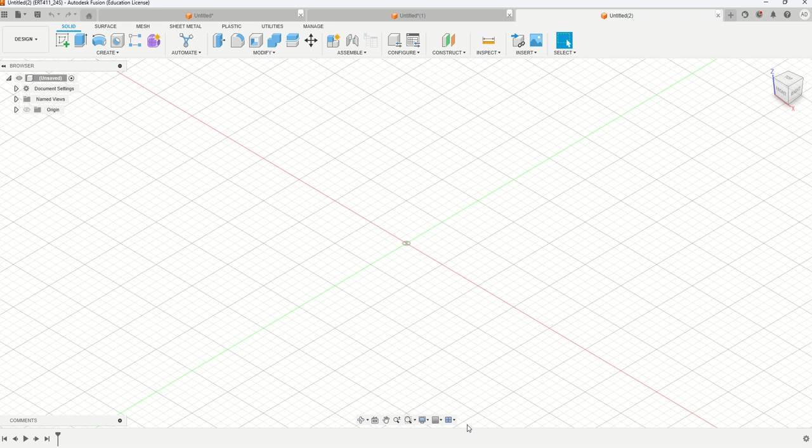Okay, here we go with our next drawing. This is going to be this one here, tutorial number 2. Draw a sketch of the model as shown in the figure by using the line tool. Alright, so this little horseshoe right here.

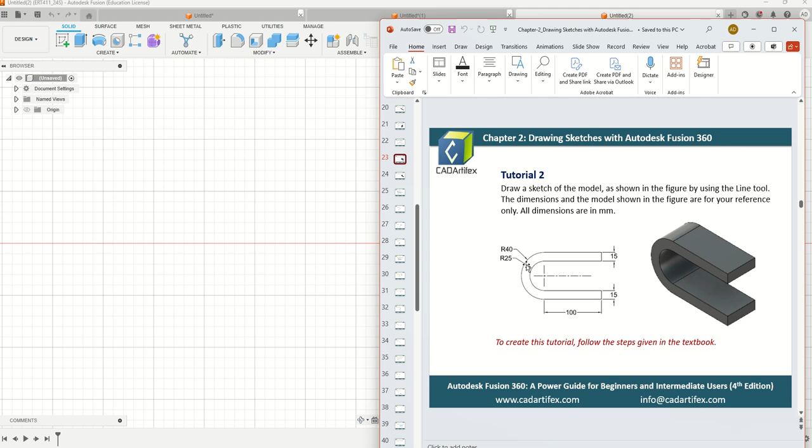So let's sketch this thing. Let's draw it again from the top. And it looks like we've got, this is 100 long by 15. And then we've got a radius of 25 and a radius of 40. So I'm going to guess that what it's trying to get us to do here,

we have 100, and then 15. Let's go up 15. And we'll come back this way 100. Now, let's draw some arcs here. I'm going to move this out.

So let's create an arc. How do I want to draw this? Let's draw a 3-point arc. So let's go from here. This is supposed to be 25. So we're going to come over 25 and up 25, which would be here.

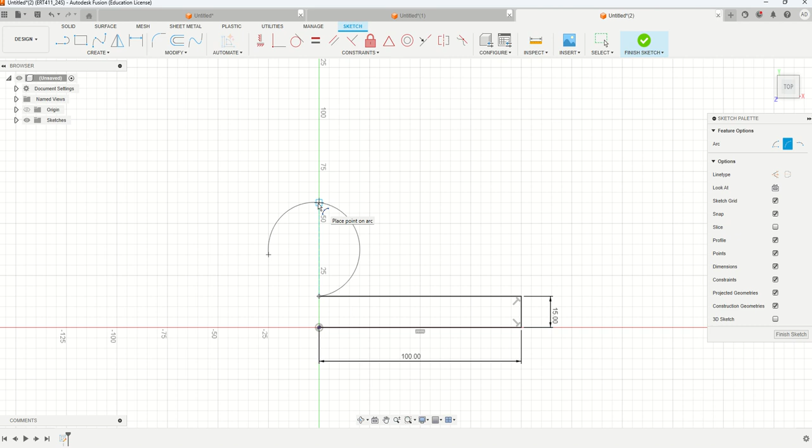I'm doing that wrong. Create an arc here and here. And place a point on the arc, which would be right here. Am I doing that correct?

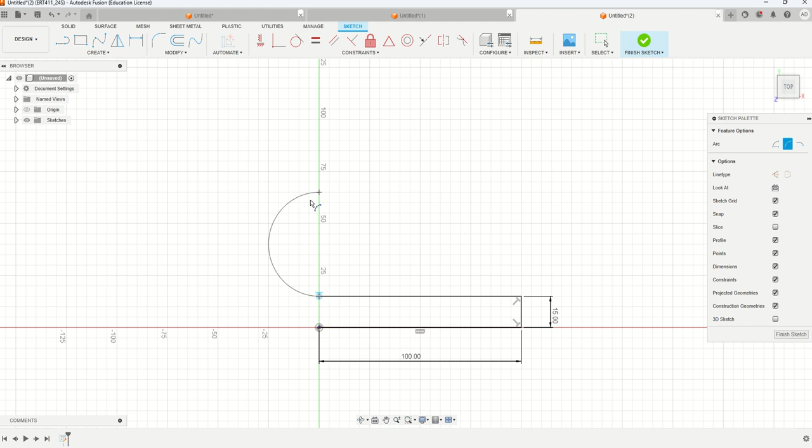No, I put that in the wrong spot. Let's go arc, 3-point arc, right here, right here. That's where I want to be. And then right there, that's the center point. So that's over 25, up 25. Right there. So that's my arc. And then if I was to dimension that, you can see that has a radius of 25.

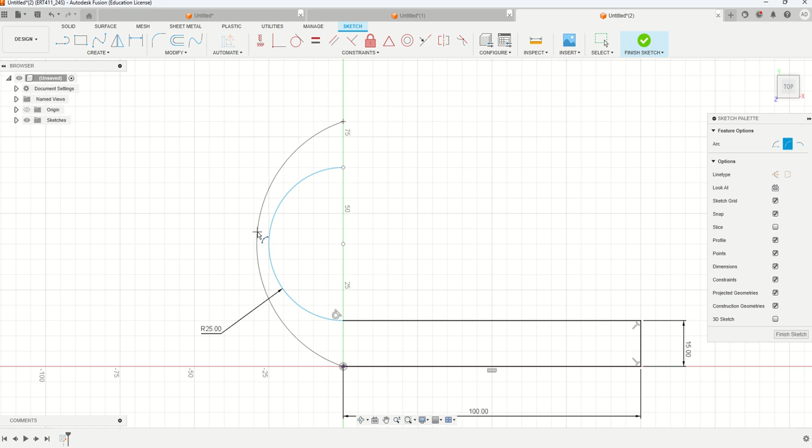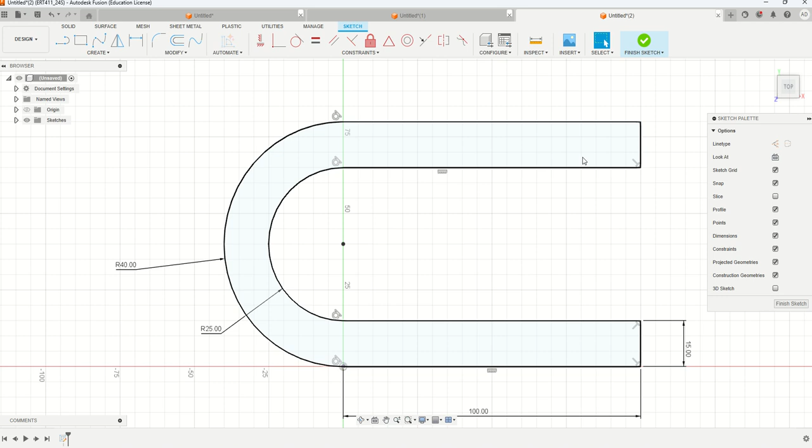I want to do the same thing with an arc, 3-point arc, here to here, right there. And if I dimension that, radius of 40. And then just duplicate what's down here, like that. And that is my shape. Finish that sketch. I have that. I can extrude that if I want. That is my horseshoe. Alright, so that is using the arc tool.

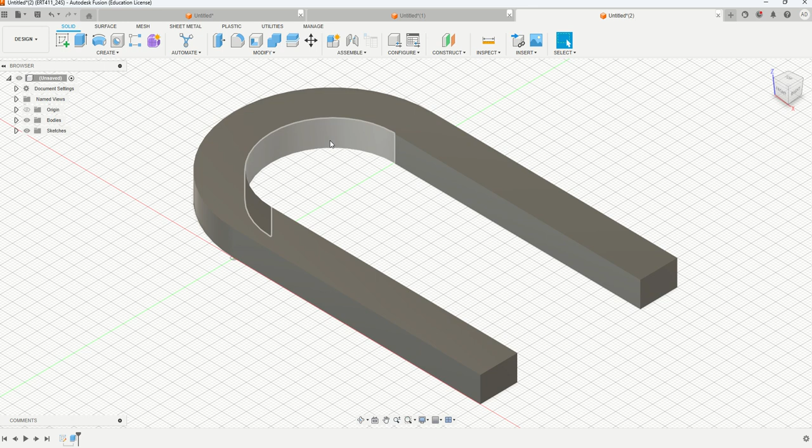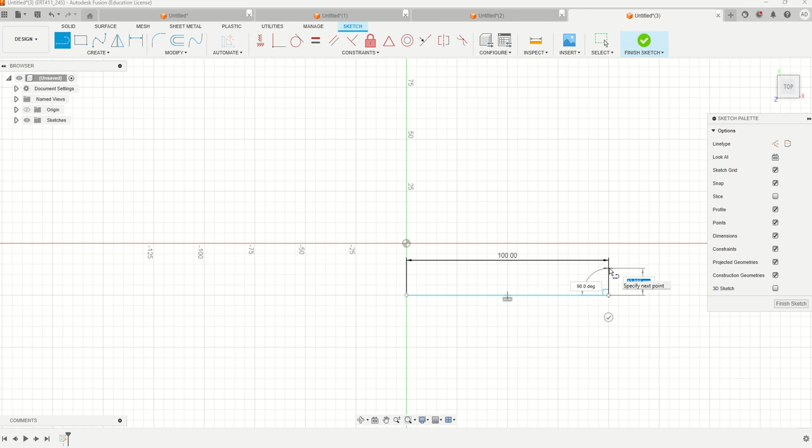It's funny because using the arc, that is one way to do it. If I was drawing this, as we will know how to draw things in the near future, we would just do it this way instead. I wouldn't make an arc. I would just make a circle like this, and draw another one here.

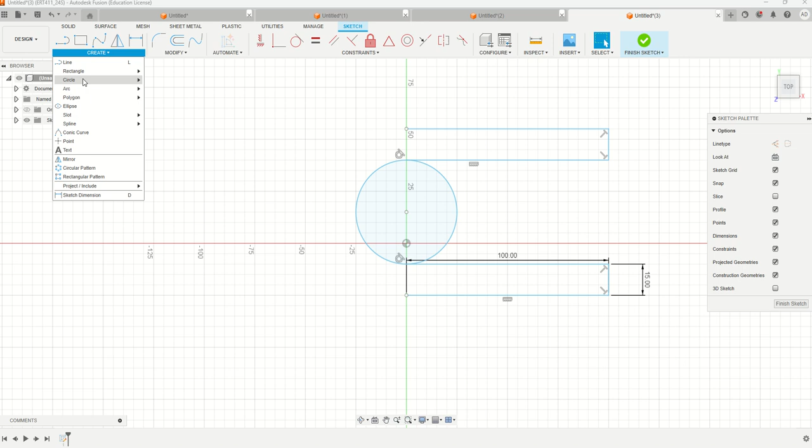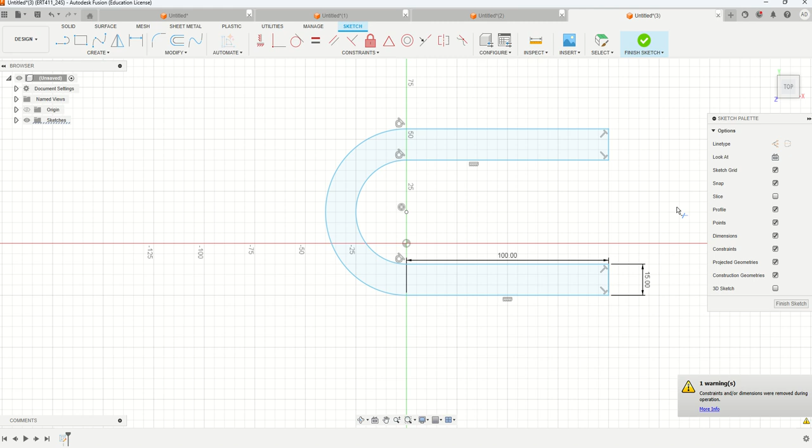What we would do is we would draw this as two circles. And then we would just use the trimming tool and basically cut these pieces away like that, which is much easier to do once you know how to do that. A lot of what we're going to do in these first couple weeks is learn the slower way to do things and then teach you the faster way to do things later on. But either of those is valid. Anyway, that is how to complete tutorial number 2.